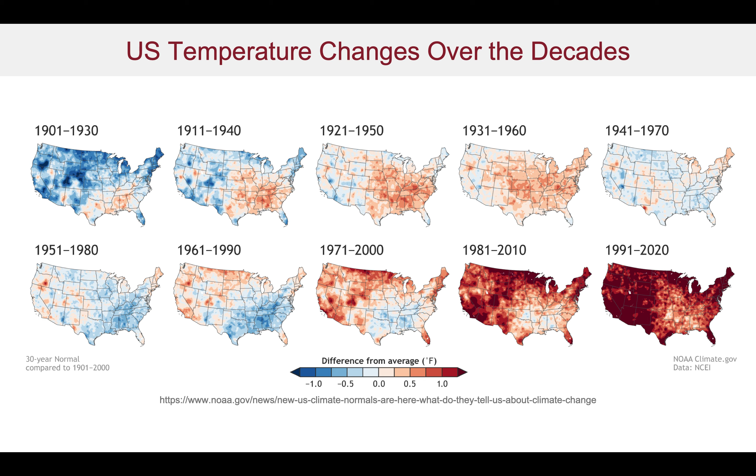It is well recognized that there have been significant temperature changes over the decades. This shows how things have varied over the US in the last century or so, with a dramatic increase in temperatures over the last couple of decades. And in fact, this past summer has seen a number of records broken in terms of temperature rises around the western coast of the US and in Canada.

But this is really not just a US problem, of course. It's a global problem. We have global warming, and this gives us a global warning because we are looking at polar melting, wildfires, drought, ocean rise, superstorms, flooding, and various other kinds of negative effects of global warming on the environment on the planet.

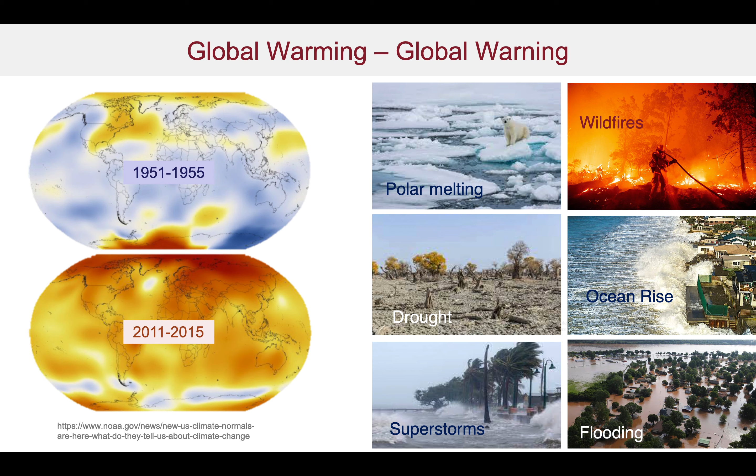This, of course, has been highlighted in the very recent IPCC report, which says this is certainly a code red for humanity and really needs to be addressed very, very dramatically in the very near future.

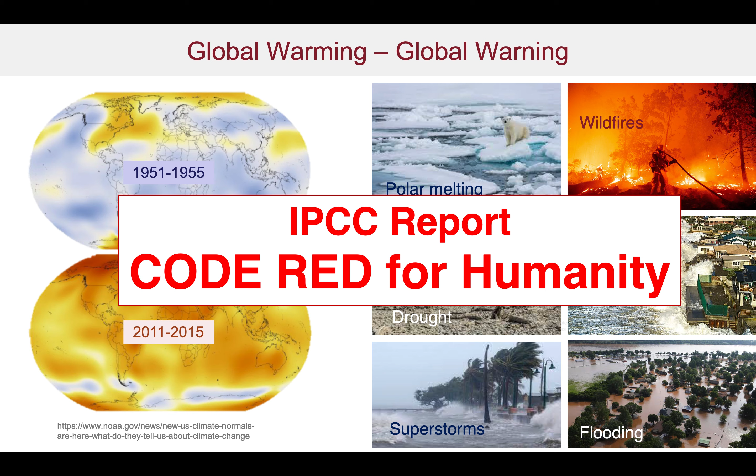Well, the global temperature change has been strongly correlated with the rise in carbon dioxide. It's a well-known correlation that the temperature rise of about a degree or so over the past century has been associated with about a 30% rise in the carbon dioxide accumulation in the atmosphere.

This has been known to give some significant negative climate effects, but it also has an impact on the oceans as well, in terms of pH and acidification of the ocean waters, with a dramatic effect on marine life and on corals and the like. So this is a very serious problem, and it's going to get worse as time goes by.

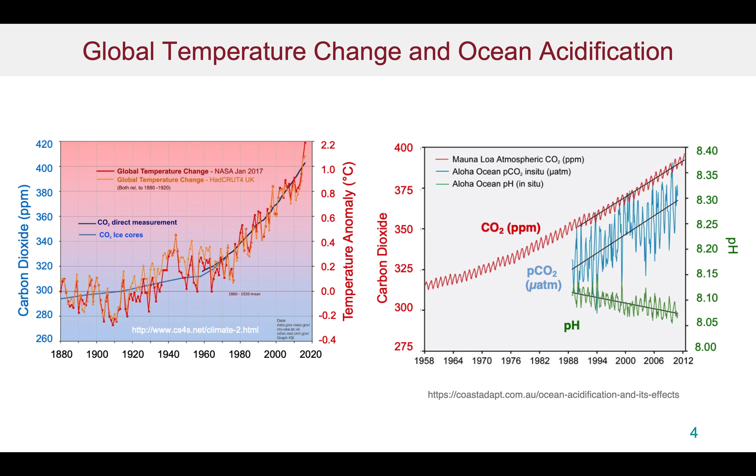Unfortunately, we are reliant on fossil fuels. The CO2 is produced, of course, from the combustion of fossil fuels, and we are reliant on fossil fuels to keep the wheels of industry churning for the time being. While we are looking at renewables coming into play, fossil fuels are going to be around for quite a while. And the emissions from fossil fuels are around 35 to 40 gigatons per year,

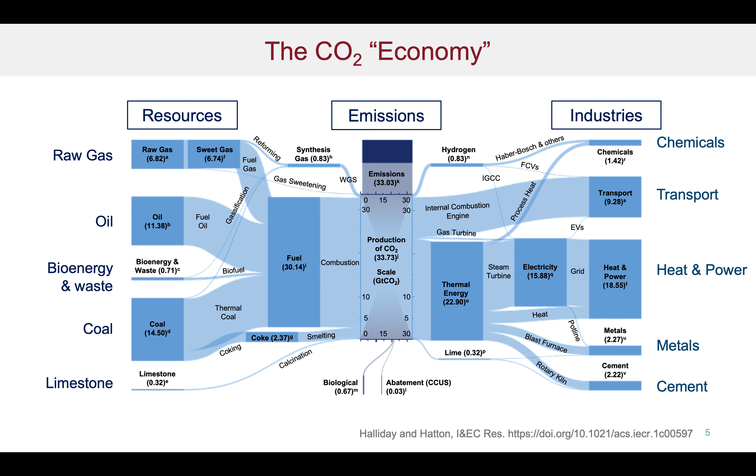which is pretty substantial. And if we go on business as usual, the emissions will continue to rise, and this will lead to a temperature rise of about 4 to 6 degrees minimum by the turn of the century, which is really unsustainable for human habitation as we know it today.

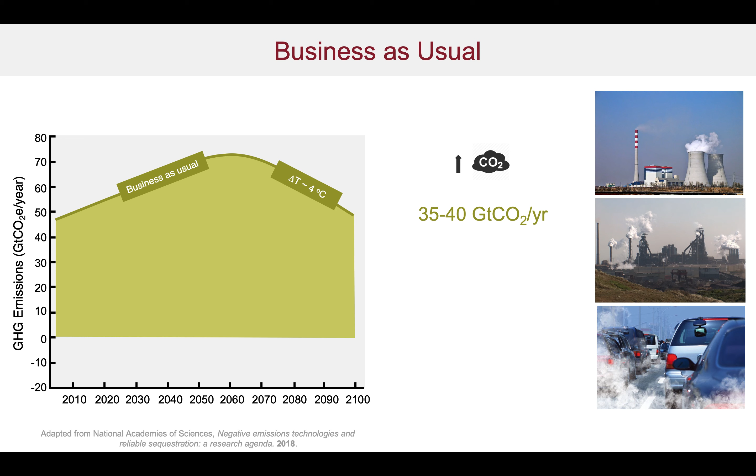So there is a very dire need for us to reduce these emissions, to keep the temperature rise below 2 degrees Celsius by the end of the century. We'll need to have this kind of a profile for the greenhouse gas emissions. And in fact, at some point, we're going to have to start taking CO2 out of the ambient environment as well. So it's not just a matter of mitigating the emissions themselves, but to actually atone for our past transgressions by taking it out of the environment.

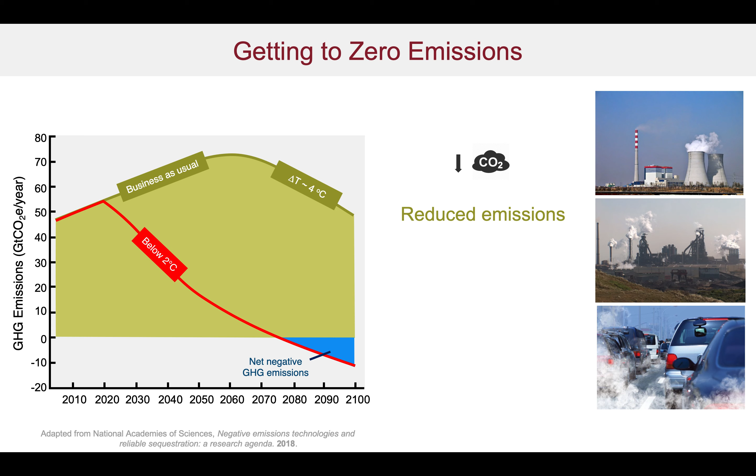So this region here is where we have to have the mitigation, and this can be done through a number of sources. One is transition to non-carbon sources for energy: nuclear, renewable, etc. But a very important component of the whole mitigation strategy is to look at carbon capture, utilization and storage.

And so we're talking primarily here about stationary carbon dioxide emitters from various industrial sources and power sources and the like. And there needs to be a net removal of this CO2 with permanent storage in subsurface aquifers or utilization in production of chemicals or building materials and the like.

But there is an issue with the fact that not all of the CO2 sources can be mitigated in this way, and there are mobile emitters and agricultural activity that also lead to greenhouse gas emissions. So we have to compensate for that in any CO2 emission strategy we might have, and this would call for negative greenhouse gas emissions

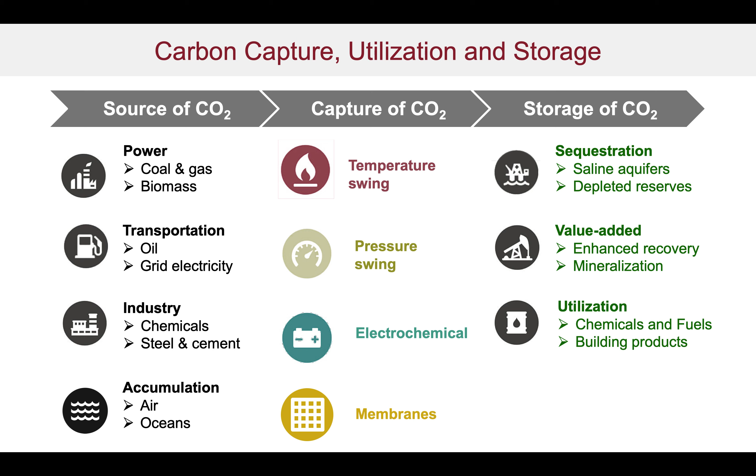So if we look at traditional sorption modes for CO2 capture and release, we have absorption and adsorption. In absorption, the gas stream, feed stream, is fed to an absorber, where they actually come into contact with a circulating liquid with which they interact. They can either be physically dissolved or the solution can be enhanced by chemical interactions with components in the sorbent itself.

Once the sorbent is fully loaded with CO2, it can be taken to a desorber where we heat it up and drive off the CO2, break those chemical bonds, drive off the CO2 as a pure gas. Then the solution must be cooled down again to be recirculated back to the absorber.

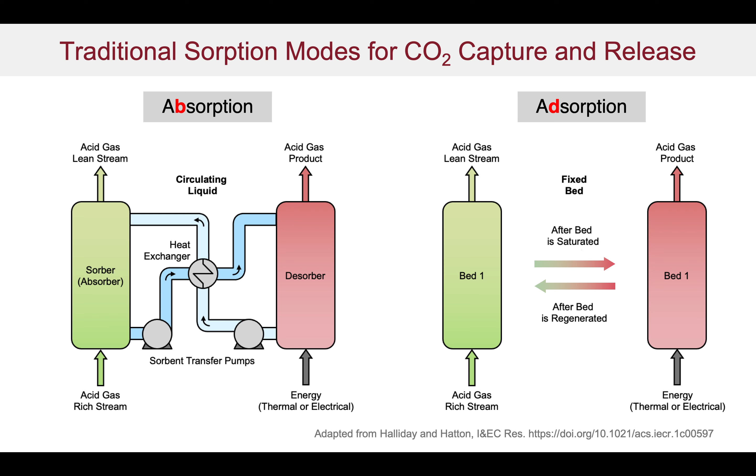On the other hand, we have adsorption type processes in which the CO2 is actually physically adsorbed or chemically adsorbed onto the surfaces of packing particles within the bed. And then once the bed is fully saturated with the CO2, it's taken offline, and we can then regenerate it again by heating up or reducing the pressure in the system. Generally thermal processes here. Now both of these can be energy intensive, and what we like to do is explore other approaches we might be able to use for these kind of operations.

In particular, I want to talk about electrochemically modulated CO2 capture, in which the capture and release of CO2 is going to be regulated by the oxidation state of the redox active species. So what we are relying on is modifying the actual interactions of various components with CO2 under different applied potentials. They can be regulated by applying different potentials as governed by the Nernst equation. There are two different approaches we can look at generally.

There's a direct approach, which is shown here, in which you have a species that will be reduced, and then this reduced species interacts very strongly with CO2, so the CO2 binds directly to the species of interest. And then when we're fully loaded, we can reverse it and oxidize the species to give us the Q back again and the pure CO2.

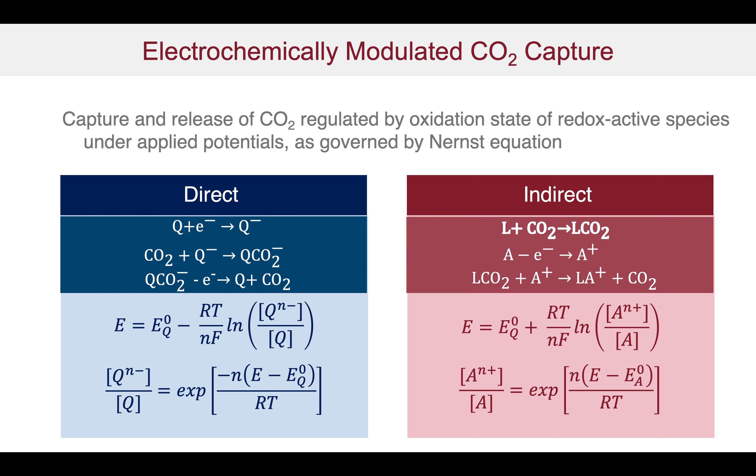When we throw that A+ in with the LCO2, what we find is that there's a strong displacement. The A+ is much more strongly favored by the L than the CO2. So it displaces the CO2 from this complex, and you then get the CO2 coming off as a pure gas again. And then, of course, the A+ can then be reduced to regenerate the L. That'll go back to give us other options for CO2 capture. Again, this is all governed by the Nernst equation, as shown here.

Electrochemically modulated process for CO2 capture, there are a number of these that we can use. The ones I'd like to talk about in particular are A and D in this thing. We've got the electrochemical generation of nucleophiles, in which case what we've got is the quinone coming in. It's a quinone type molecule. It comes in here. It will be reduced at the cathode chamber, where it's also contacted with CO2 through gas diffusion electrodes in this case.

And when we get the reduced quinone, it will react very strongly with the CO2 to form the biscarbonate, as shown here. This can then be taken to the anode side, where the quinones are reoxidized, and the CO2 is released, and we regenerate the sorbent. So this is a cycle in which we have a direct interaction.

The same kind of systems can be used indirectly when we've got protic solvents. In this particular case, when we get the reduction of the quinone, it actually gets protonated rather than capturing the CO2. It captures the protons, and this really causes an increase in the pH, and therefore an increase in the CO2 capacity to form a bicarbonate in this particular case.

On the other hand, when this is reoxidized, the protons are released, the pH goes down, the bicarb is transformed back to carbonic acid, and the CO2 gets released in this particular case.

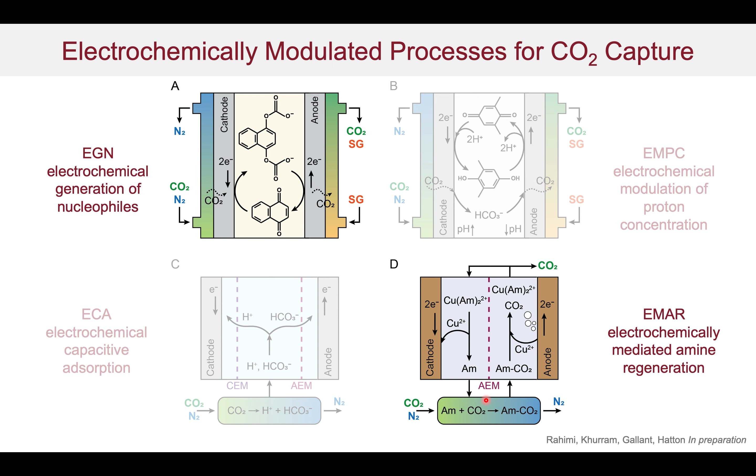So first, let's talk about the electrochemically mediated amine regeneration process. I hope to be able to show you that there are some significant advantages of this, and there could be some really energetic advantages as well as possibly economic advantages. Typically, we'd have an amine solution come into contact in the gas absorption column with the CO2 to form the carbamate, as traditionally done. And then what we want to do is be able to regenerate this in the desorber unit.

But rather than doing this thermally by heating up, what we do is we take it into the anode chamber of the system, where the oxidation adds copper ions, and this will then complex with the amine and kick off the CO2. Once you've got that, we can then disengage the CO2 in the flash tank, and then the solution can be fed back to the cathode as the amine copper complex.

In the cathode chamber, what we do is we reduce the copper, and we then regenerate our amines, and the copper is plated out on the cathode electrode, and we can go through this complete cycle. This is actually a process we've done. We've spent a fair amount of time looking at it, and we have a bench scale unit that's been operating effectively for many hundreds of hours on and off.

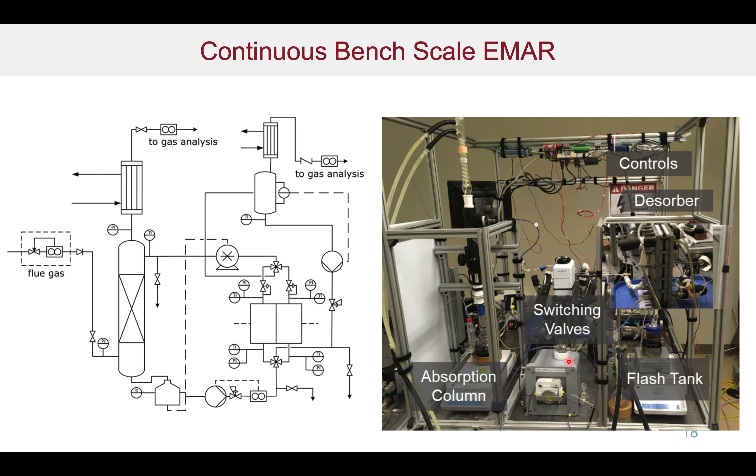And this shows the overall unit. That's the electrochemical cell we have. It's about 10 centimeters by about 20 centimeters in size. We've got all sorts of other things here. We've got the absorption column, we have switching valves and things like that. And this has been used rather effectively over many cycles. This is 100 hours of continuous operation.

And what happens, of course, is that the anode dissolves, the cathode grows, and at some point we need to reverse these, so the cathode becomes the anode and vice versa. So we need to reverse the potential and also switch the flows between the two chambers. But that is really readily done through switching valves and the like.

This shows you the kind of results that we can get. In particular, what we're interested in is what is the gas output product. And you can see that generally we're getting around about 100% CO2 coming off our column in this regard.

And the gas output rate is very close to the theoretical gas output rate, which is really controlled by the current itself. This is the applied current, and that determines the rate at which the CO2 is going to be released, because that determines the rate at which copper is released. And so then we get the cell potential as shown here.

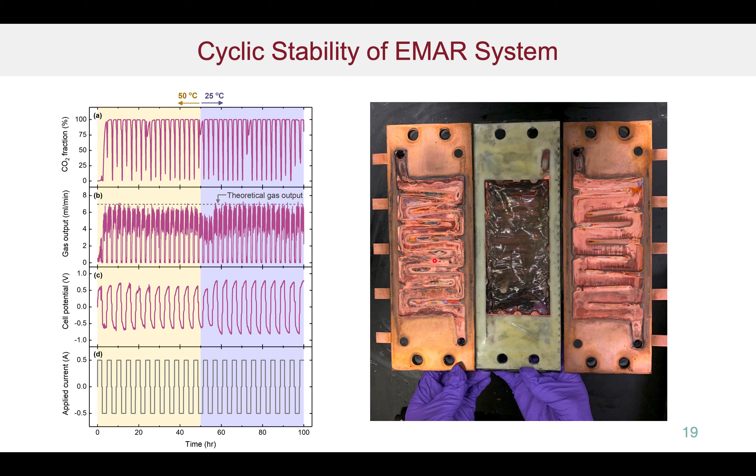You can see these electrodes look pretty good after 100 hours of operation. They still look very clean and just look like pure copper here. We don't get much contamination with other species on the electrodes.

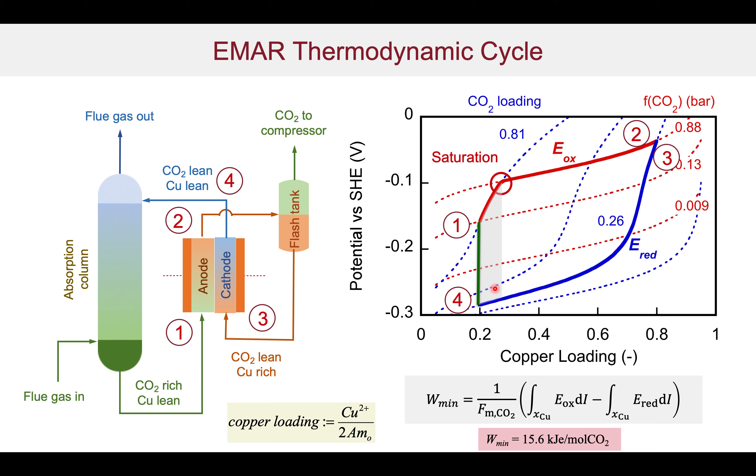I do want to point out that what we're interested in is how many electrons are required per CO2, or how many CO2s are released per electron. Initially it's not 100%, because the initial electrons introduced in this region are not effectively used for releasing CO2 into the gas phase, since the CO2 is still retained in solution. So we don't expect to get really close to 100% Faradaic efficiency, but we can expect to get quite close to that.

One of the things one needs to be concerned about: those are under thermodynamic equilibrium conditions. But we need to think about what the actual overpotentials are to drive that reaction at a reasonable rate. So now we're interested in the variation in potential as a function of the position along the cell. Our copper loading goes from 0.2 to 0.8 here, and on the cathode side from 0.8 to 0.2. So you can see we've got the two curves shown here for the reduction and the oxidation states.

The particular potential applied would not follow these curves. It would just be a constant potential. You apply constant potential across the electrodes, along the whole position itself. So we immediately see some inefficiencies here associated with the fact that the electrodes are at constant potential rather than varying potential depending on the concentrations.

So what we've got to think about then is not only that, but we also have to rely on the fact that we need to drive this at a reasonable rate. So we need a stronger driving force, and this is why we have to apply overpotential as shown in the blue here, and this provides added inefficiencies, or added energetic costs associated with the overall process.

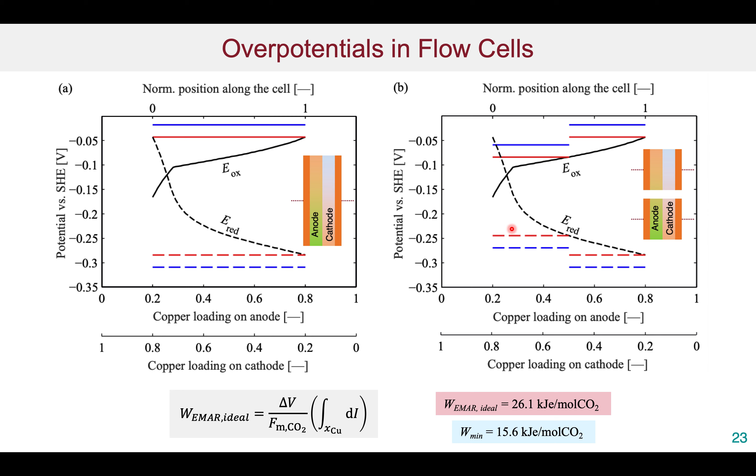The energetics of the amine system are similar to what we see in traditional MEA or thermal EDA, the thermal type processes. The interesting part in here is the EMAR process is the minimum work that's done for the electrochemical methods, and then we've got to worry about the overpotentials. And this is an area where we might be able to get some significant advantages by clever design and engineering of the electrode systems themselves.

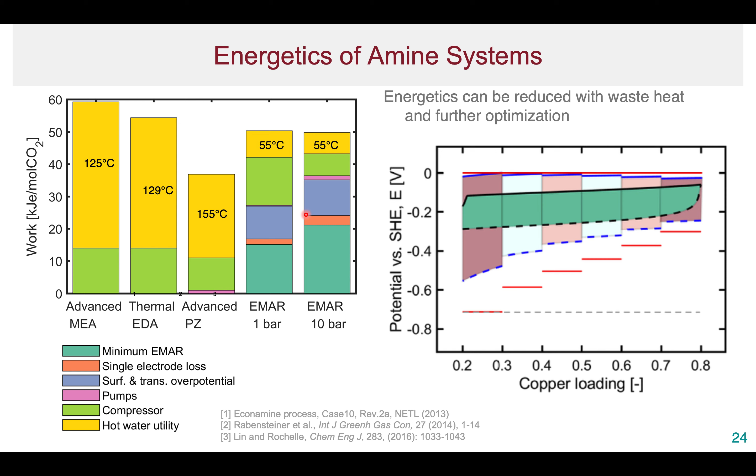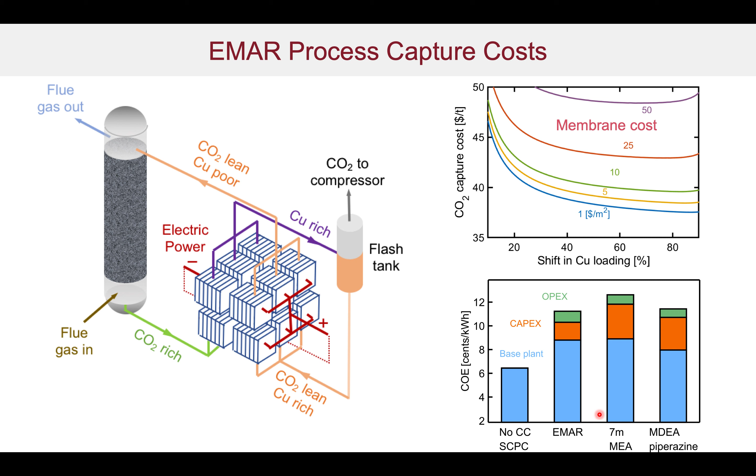The actual costs, from a strong techno-economic analysis allowing for all sorts of inefficiencies and other processes, indicate that we can be between $40 to $45 per ton, depending on the actual membrane cost. It's determined significantly by the membrane cost itself. And the cost of electricity would be similar to what you see in the MEA and other kinds of processes. But these were done early on.

We've done some more work on this since then and recognized that by modifying the solution conditions and the like, we can actually enhance the overall performance of these systems. And in particular, if you use mixed amine systems, the EDA, AEEA, aminoethylethanolamine case, what we find is with a 50-50 mixture, we can actually reduce the cell voltage required quite dramatically. So overpotentials are reduced, which is something we'd like, and the energy consumed is going to be significantly less as well. And so it's much less than the 40 kilojoules per mole.

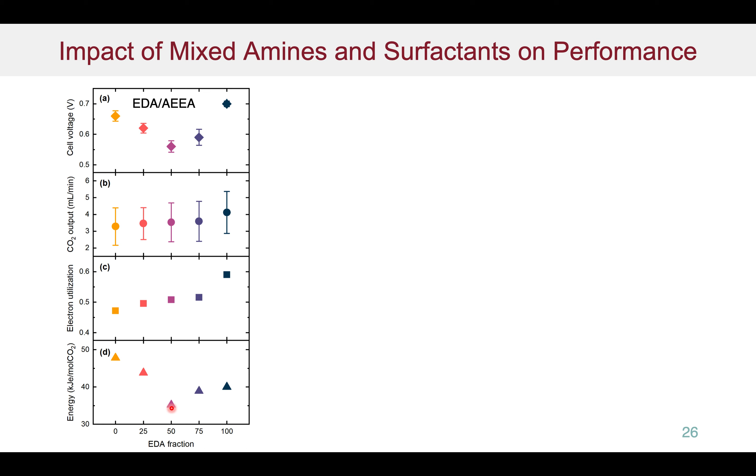In addition, we can add surfactants to the system. We find that initially there were issues associated with the bubble formation, hindering the electrochemistry at the surface of the electrode and leading to actual particle formation in the anode chamber, which was rather unexpected. But by adding surfactants to the system, we can reduce the bubble size, and we can modulate the overall electrochemistry at the surface of the electrode.

Now, I'd like to switch gears and go into the other one. So that's just talking about the indirect approach. How about the direct approach? Well, there's been some work done in the past by others as well, but we've latched onto this, looking at the quinone type systems, in which quinone, as shown here in the dormant state, really has no affinity whatsoever. It just ignores the carbon dioxide that's around.

However, when you reduce it, it gets very strong electron density on the oxygens here, which provide a very good site for the electrophilic CO2 to be captured to form the biscarbonate, as shown in this particular case. So we capture the CO2 by the agent that's been electrochemically activated. Once this is fully loaded, we can now take it and oxidize it again to release the CO2 and regenerate the dormant quinone that can be used.

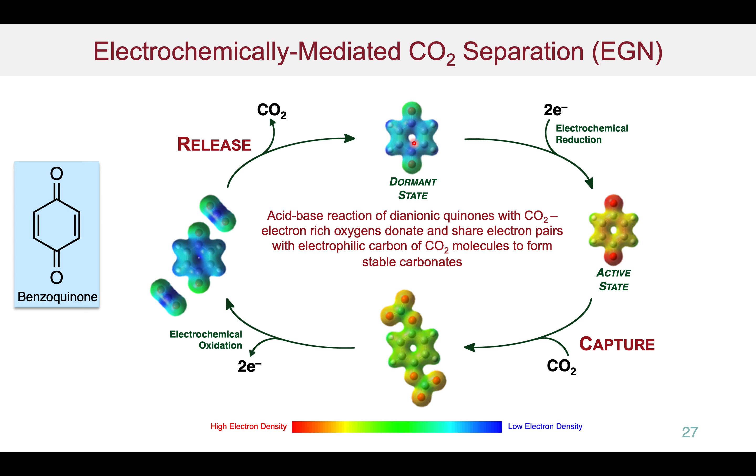Now, we've done some work looking at a new type of approach, electro-swing adsorption kind of operations, as opposed to having these quinones in solution. What we do is we take the quinones and we immobilize them on an electrode substrate. So this is the quinone-immobilized electrode substrate, anthraquinone in this particular case.

And then we need a counter electrode to be able to complete the circuit. In this case, we used a ferrocene counter electrode. We had this particular kind of configuration, and this whole thing is bathed in ionic liquid electrolyte to provide the ionic current and be able to close the circuit.

So what will happen is when we reduce the quinone, we'll be able to capture the CO2 as shown in this particular case, and the case here. By the same token, we oxidize the ferrocene to ferrocenium to provide the electrons for the reduction of the quinones. When you want to release the CO2, of course, you just reverse the potential. In this particular case, on the oxidation, we get the CO2 being released, and the ferrocenium is now being reduced back to ferrocene. So that completes the overall electrochemical cycle.

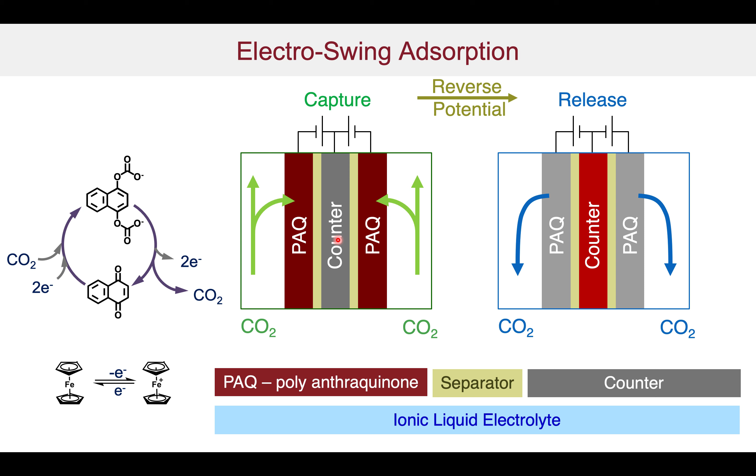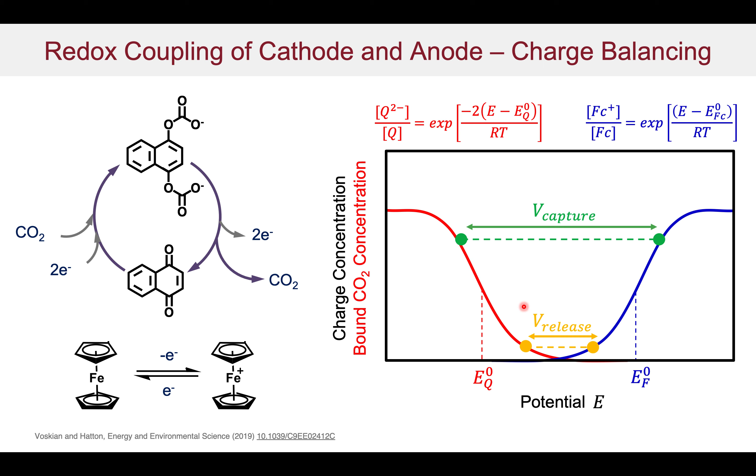Then, if we want to release the CO2, we can come down to a much lower voltage, as shown here, and this is the amount of CO2 that would now be bound to the quinones relative to what was before during the capture stage. So this is the amount of CO2 that is being released following capture in the system. So that is really the overall concept that we're going to follow.

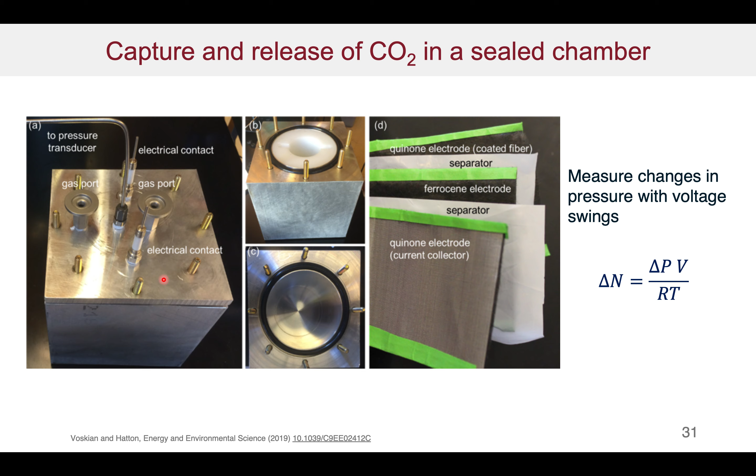This gives an indication of the way in which we did the initial experiments, the electrode structure and how we assembled the electrodes. We put these in a sealed chamber with electrical contacts, connected to a pressure transducer. Introduce CO2 into the sealed chamber, and when we apply the reduction potential, the CO2 gets absorbed, the pressure goes down, and you can calculate the number of moles absorbed. When you reverse the potential, the pressure should go back up again.

Another way you can look at it is a flow system in which CO2 comes into gas diffusion electrodes, and we monitor the total CO2 that's coming out, and from the integral of the CO2 leaving, we can estimate how much has been absorbed on the polyanthraquinone electrode.

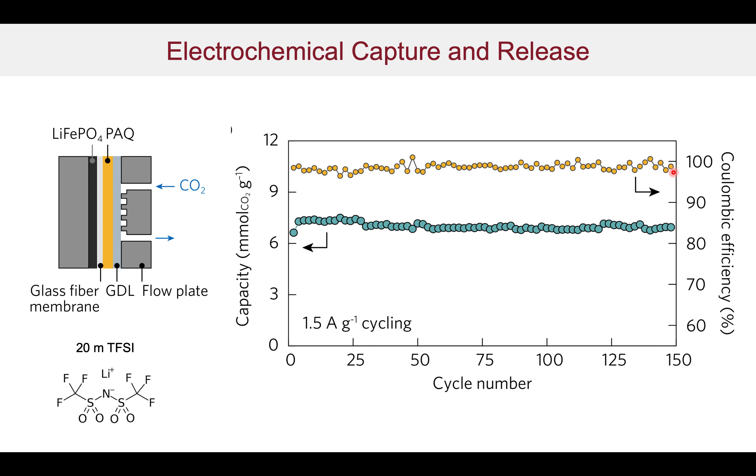In this case, we used a different cathode electrode, a lithium iron phosphate electrode here, all in an ionic liquid. An important part about this is that the capacity, the overall working capacity of the system, did not vary over about 150 cycles, as shown here, and our coulombic efficiency was really high in this particular case, close to 100% for the most part, which is really encouraging.

Of course, that's not the way we're going to operate in a real-world situation. What we'd want is to have an adsorption bed, in which we have the electrodes in the bed, as shown here. This is a stack of electrochemical cells. We introduce the CO2 at a certain concentration on the feed side, and as it passes through, the CO2 gets absorbed, and the gas leaving out here would essentially be depleted of CO2. As the bed gets filled up, this concentration front moves through the bed until eventually the total bed is saturated, and the concentration begins to increase.

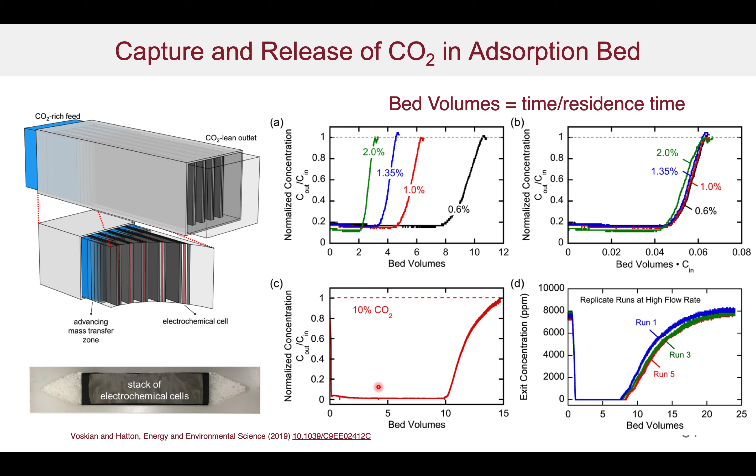You can see here the normalized concentration, the outlet concentration as a function of the inlet concentration. Let's look at this one here. You can see we're removing essentially all the CO2 in this particular case until about 10 bed volumes. That's the time over typical residence time. And only then do we begin to see a breakthrough. This shows a very strong absorption capability for the beds.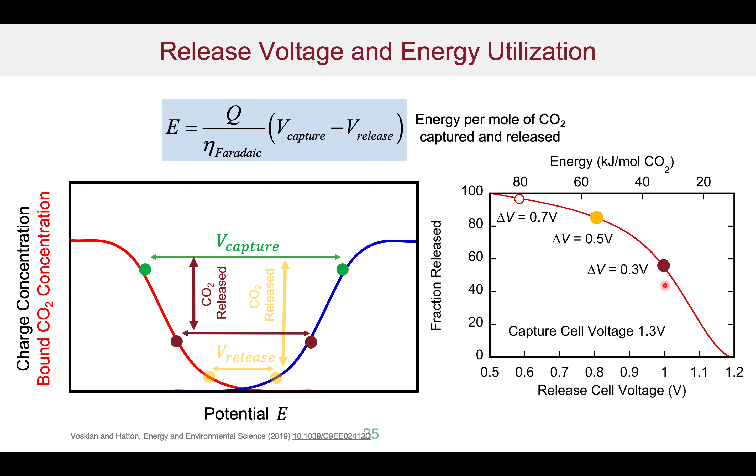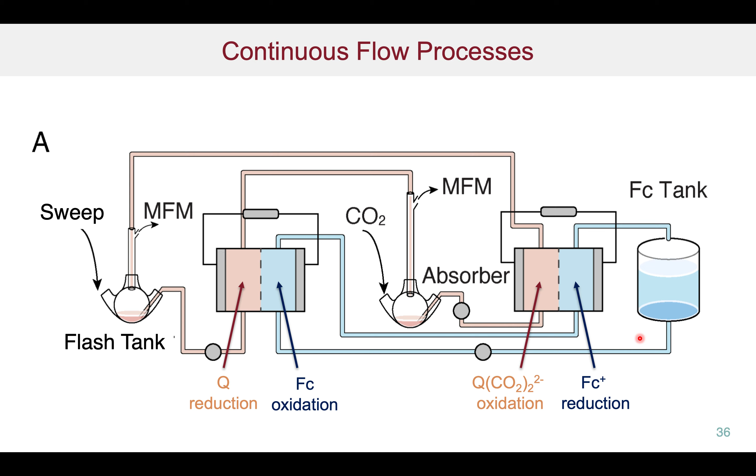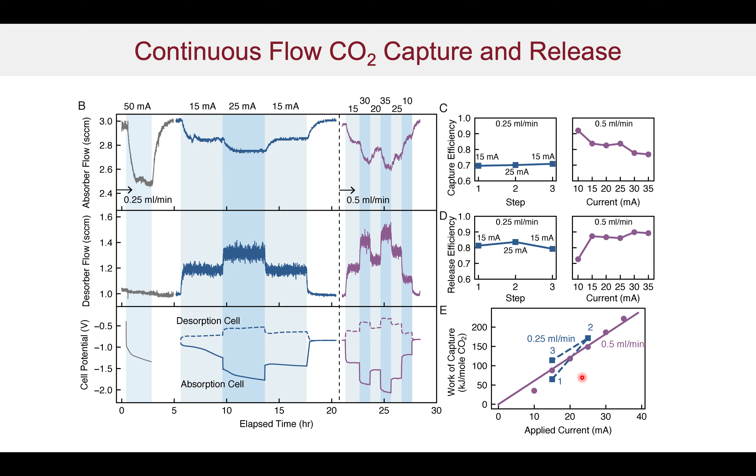And we've shown that this works. There's still some work to be done to optimize it, but in particular, how much CO2 are we releasing in the desorber flow? We can show it as a function of current in the desorption unit. As we go from 0 current to 15 milliamps, 25 milliamps, and back to 15 milliamps, we can regulate rather well the rate of release of the CO2. The energetics aren't as favorable at this point. We're still pretty high, about 100 to 150 kilojoules per mole, much higher than we'd like, but it's something we can work towards.

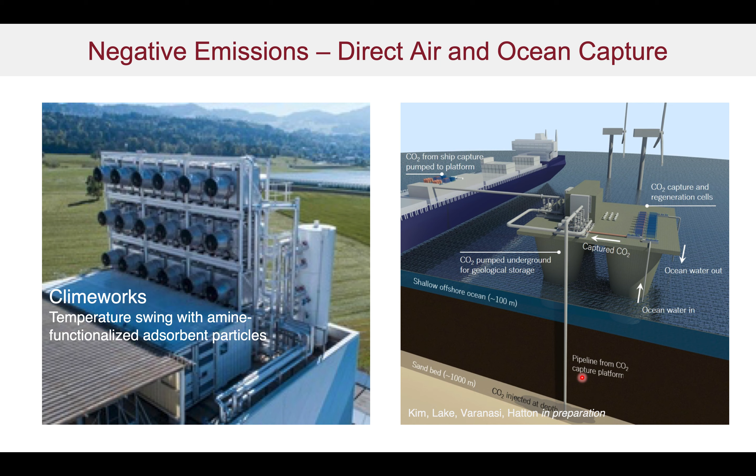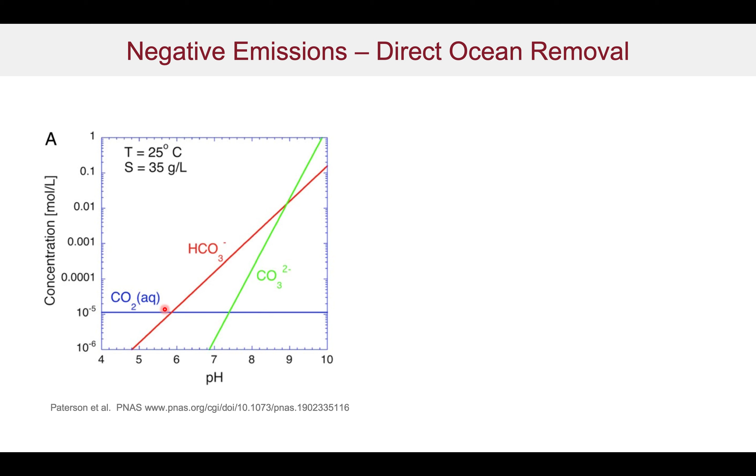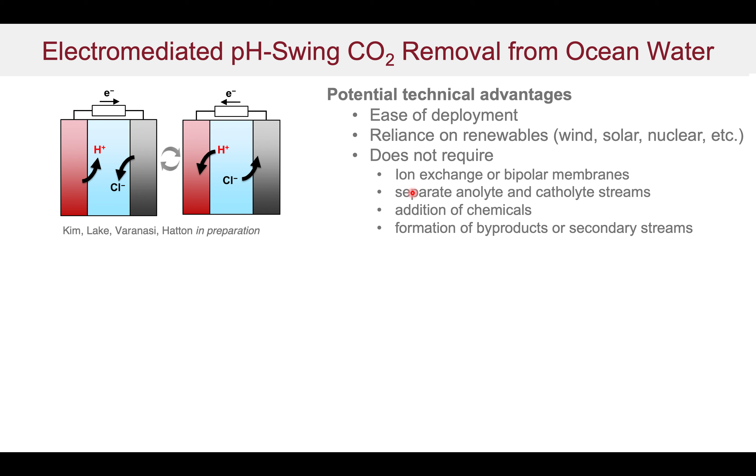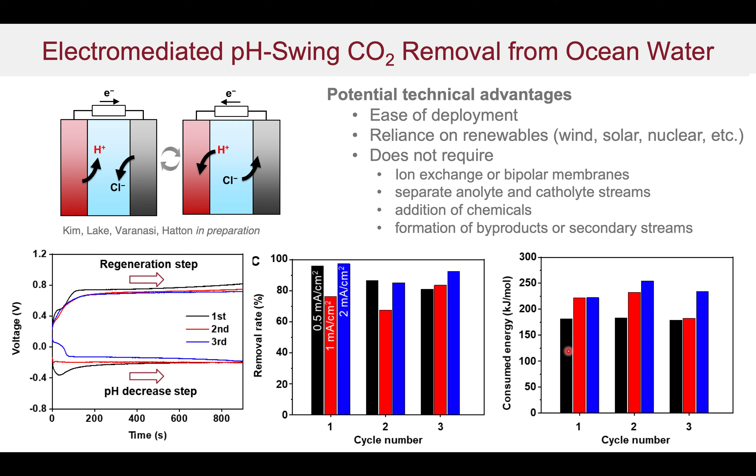So where does all this energy come from? Well, we need carbon-free energy sources for negative emissions. We can rely on a distributed capture and release, or a centralized release in which we capture all the CO2 in a solution and then release it all at a centralized location. The capture rates would be on the order of 500 kilotons per year of CO2, the energy at about 1 to 4 gigajoules per ton, and the power would be about 15 to 60 megawatts.

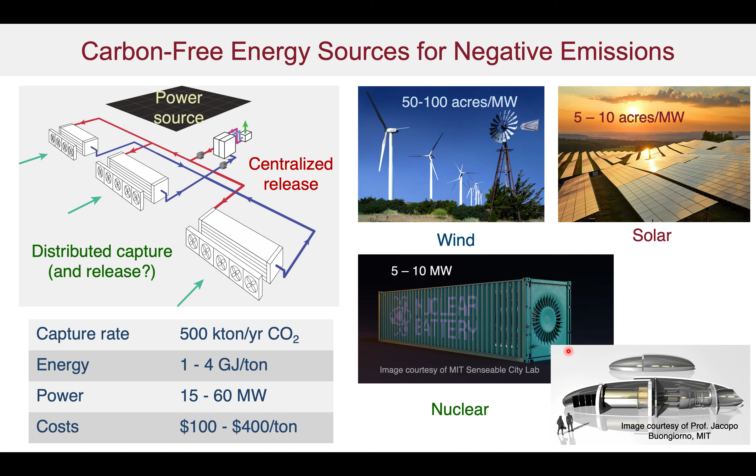And this brings us to what kind of sources do we need? Well, we can use solar and we can use wind, of course. They do take up a lot of real estate. Or we could use some of the new ideas in terms of nuclear batteries. I know that colleague Jacopo Buongiorno is looking at something like this, in which you might be able to fit a 5 to 10 megawatt unit into a container as shown here. So these are fairly versatile.

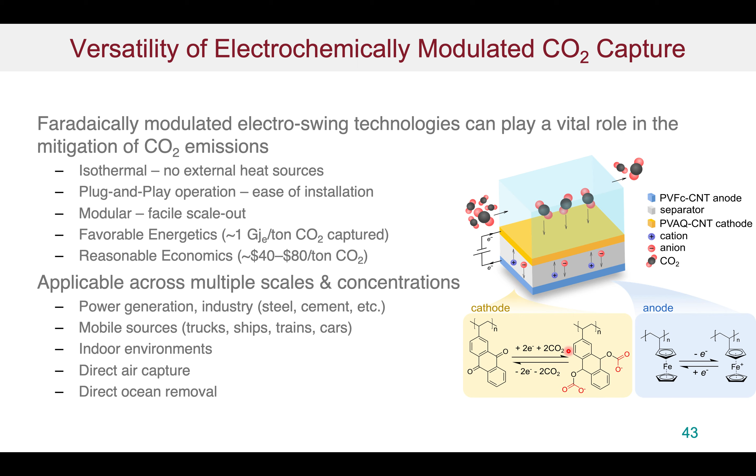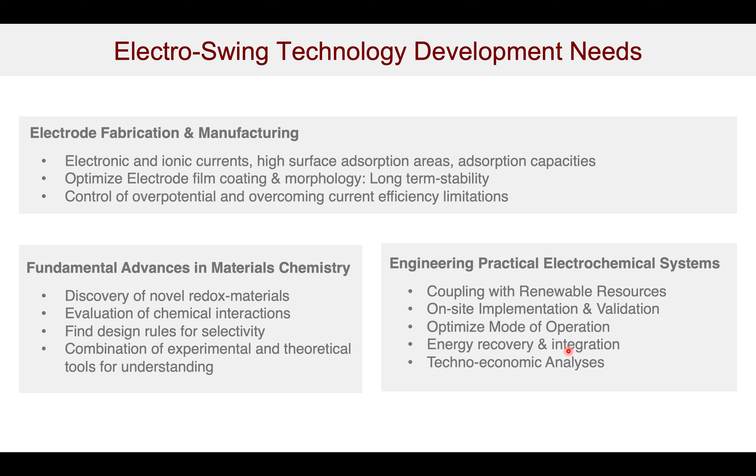These Faradaically modulated electro-swing technologies can play a vital role in the mitigation of CO2 emissions. They're very versatile approaches, and they're also applicable across multiple scales and concentrations. There are, of course, a lot of challenges. We need to know how to make these electrodes very effectively and cheaply. We need fundamental advances in materials chemistry to enhance the overall operations, and then we need to engineer the practical electrochemical systems.

I do want to point out that this whole area of electrochemical technologies for CO2 capture is still in the fledgling stage. There is some interest now. It's suddenly growing in the last 2 to 3 years. The number of publications in this area has blossomed, gone up about threefold in the last couple of years. So there's a growing interest in this area. And the DOE is also very, very interested in pushing these concepts.